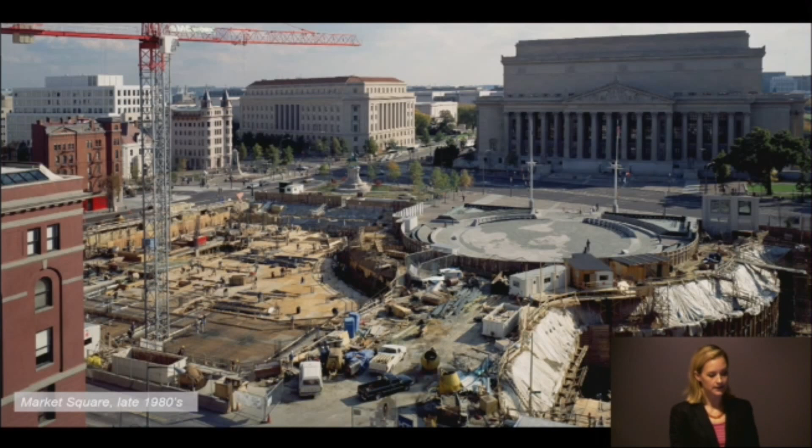Over 40 years ago, in 1972, Congress established the Pennsylvania Avenue Development Corporation, PADC, to direct millions of dollars in public and private reinvestment into the street after it had fallen into disrepair. The PADC developed the 1974 Pennsylvania Avenue Plan and square guidelines to carefully restructure the avenue into a place that would balance the needs of the nation and the city.

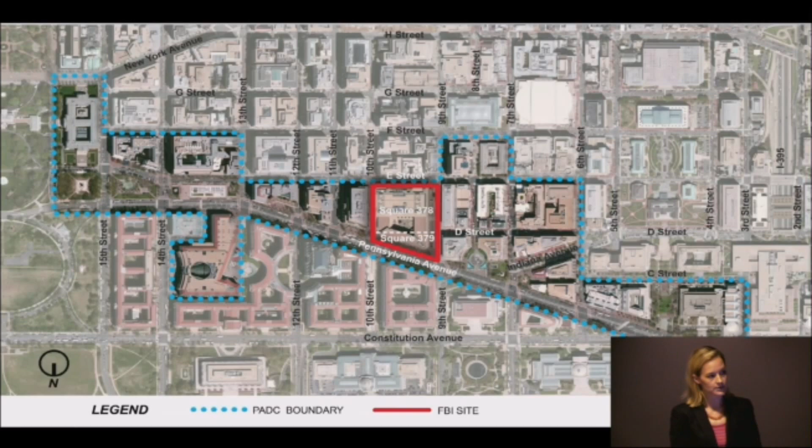And during this time, at the center of it all, the J. Edgar Hoover building was constructed to house the FBI headquarters. The Hoover building and the site fall squarely in the center of the PADC boundary and the avenue itself. You can see square 378 to the north, and then square 379 directly on Pennsylvania Avenue.

While PADC was dissolved in 1996, the plan and related documents are still in effect today and will guide redevelopment of this site. The 1974 plan is the foundational document that includes the goals, objectives, and the development framework for the area. PADC also developed general guidelines which provide uniform standards for development, such as high architectural quality, for example.

And finally, PADC developed square guidelines for each square in the PADC boundary. These provide the most guidance for development and are similar to zoning. Interestingly, square guidelines were not developed for squares with federal facilities, so squares 378 and 379 with the Hoover building don't have any.

When the plan and square guidelines were created, it was not anticipated that this site would become private in the future. The plan itself simply describes the Hoover building, which was under construction when the plan was created, and envisions the site for federal office use.

So in anticipation of the site transitioning to a private use, GSA and NCPC worked with stakeholders this past winter to amend the plan. It now envisions the site as a high-density, mixed-use development, which I'll talk more about as we dive into the topics for square guidelines.

Okay, so now I want to talk a little bit about what square guidelines are in specificity and then also the process for developing them. So by definition, square guidelines are detailed urban planning and design requirements and recommendations which are applicable to each square, and basically they're there to help implement the Pennsylvania Avenue plan.

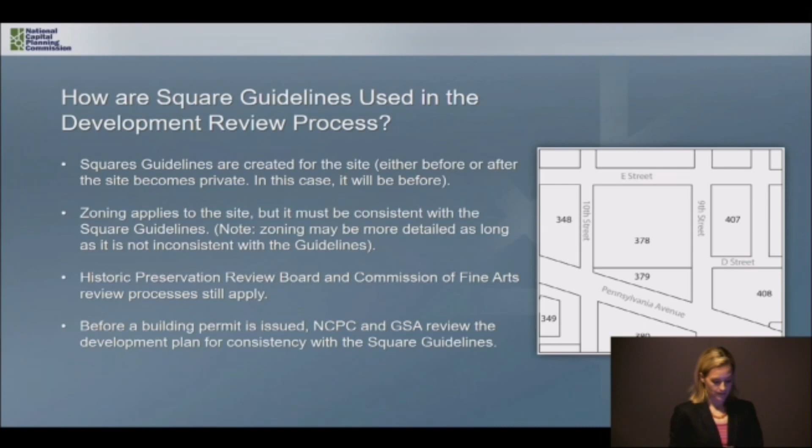So here we are this week, April 26th and 28th. As Elizabeth said, we're having the same meeting twice, just so that people can attend.

We'll be talking largely about topics in square guidelines today. What we would like to do is go to our commission this June with a very high-level proposal of the different topics we think we'll include in the square guidelines, and also a high-level concept for building massing. Then throughout the summer, we'll be working with stakeholders to develop a more complete draft of the square guidelines.

We'll do an information presentation for the Commission of Fine Arts. We'll hold another public meeting, and then we plan on coming back to our commission here later in the fall with that draft concept, and then we'll come back one more time, likely at the end of the year, with a final version. So there really are four more opportunities for public input on these guidelines.

In terms of the larger picture, there are other processes underway this year that are relevant to the development of square guidelines. Federal agencies and other stakeholders are working through the Section 106 process to ensure this project does not have an adverse effect on historic resources such as the Pennsylvania Avenue Historic District.

GSA will be issuing the final environmental impact statement later this fall. And lastly, NCPC is leading the Pennsylvania Avenue Initiative, which is an effort to update or prepare a new plan for the avenue.

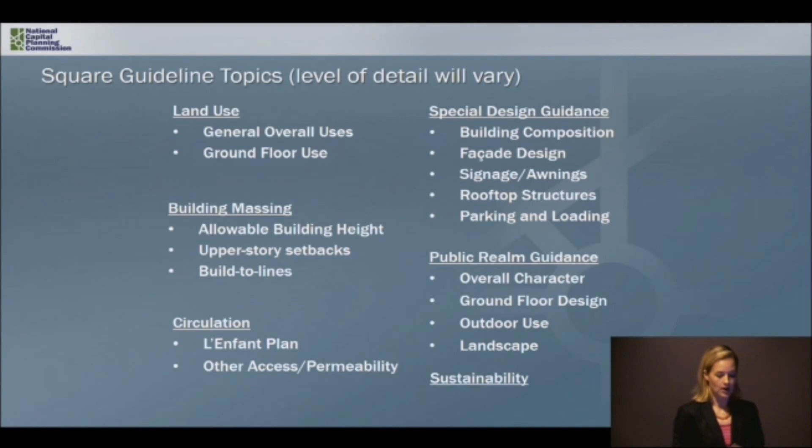And I'll walk through some of these now and talk a little bit about what the plan amendment said and opportunities to provide additional guidance.

So the first is land use, and actually the plan amendment addresses land use in a decent amount of detail. It calls for accommodating high-density development with a mix of uses such as commercial, residential, and cultural uses. It calls for that new development to complement and enhance all of the surrounding downtown blocks, and that ground floor uses are designed on Pennsylvania Avenue to accommodate and encourage everyday activities, commerce, and public uses. So we have an opportunity in the guidelines to provide more direction if we think it's necessary.

While a specific land use mix for the site will be difficult to determine at this time, as I mentioned before, the guidelines could emphasize desired land uses or ground floor uses on Pennsylvania Avenue, for example.

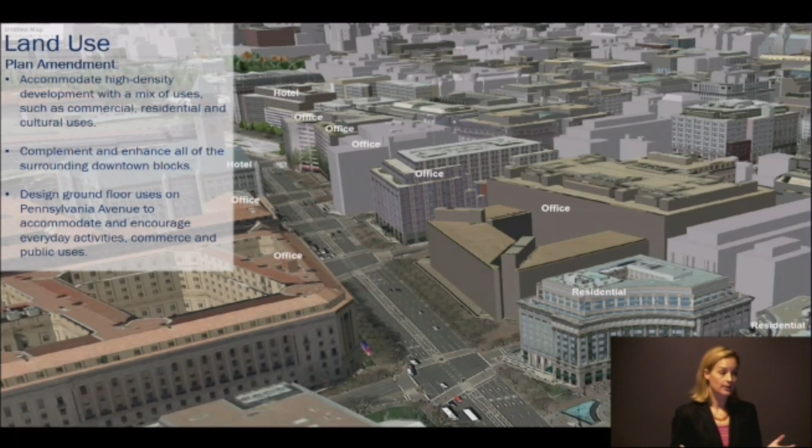Okay, so the next topic area is building massing. This means the overall shape of the building, or of the development, in terms of volume. The plan amendment has a clear vision for high-density development and states that building massing and articulation should befit its location, meaning new development should look to its surroundings.

Two components of building massing are height and upper story setbacks. These contribute to protecting view sheds, creating a consistent building wall along a street, and establishing a scale that is comfortable for a pedestrian. Interestingly, the Hoover building sits at a transition point for the avenue.

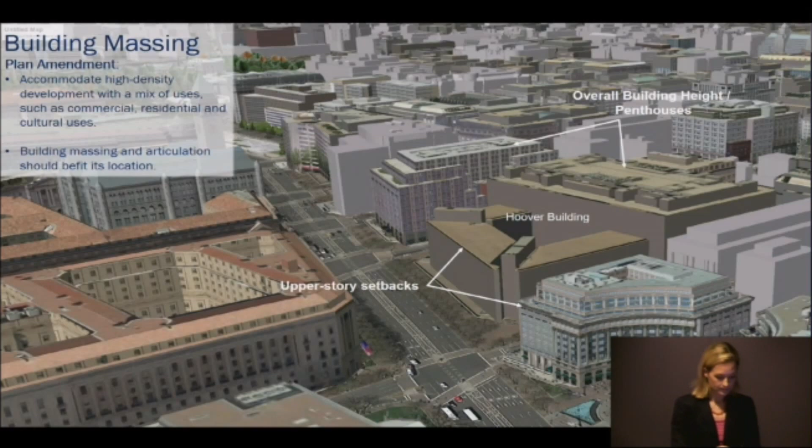Build-to lines, sometimes referred to as setbacks, indicate the line at which construction of the building facade can occur on a lot. For example, the current build-to line for the Hoover building is 75 feet from the curb of Pennsylvania Avenue. Build-to lines are important because they can have an impact on view sheds, the building wall along a street, and the character of the space in front of the building, in addition to the overall developable area of the site.

The plan amendment calls for redevelopment to respect the principles of the L'Enfant Plan by restoring views, and new development should provide and contribute to the avenue's distinguished character, and strengthen the vista of the U.S. Capitol.

Given the broad guidance in the plan amendment, there is an opportunity to look at the site's build-to lines and the square guidelines in more detail, and we'll actually look a little bit at that in the next section of the presentation.

Circulation is an important concept for a site this large. You'll notice that a single FBI building is comparable to the three buildings to the east. The plan amendment calls for redevelopment to respect the principles of the L'Enfant Plan by restoring circulation patterns.

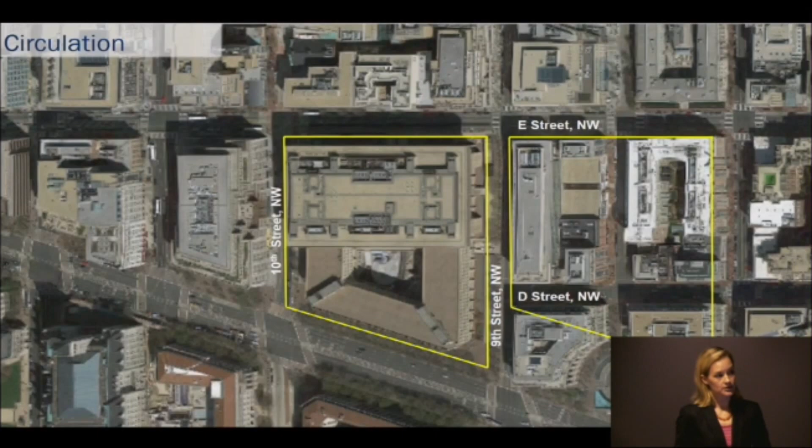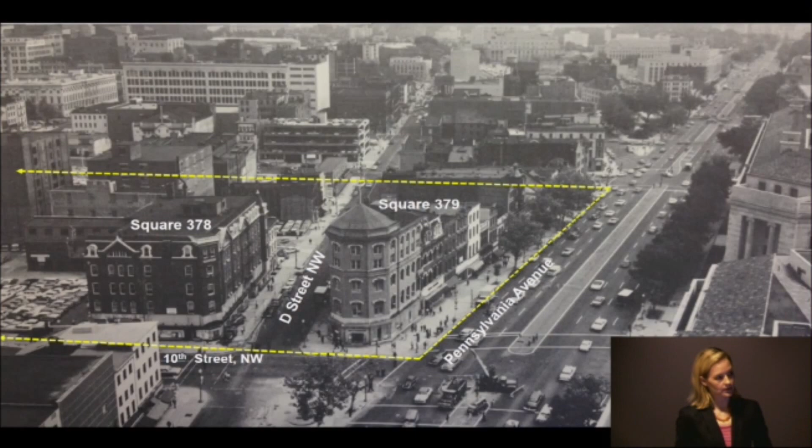And this is where D Street ends today. There's an opportunity in the square guidelines to acknowledge whether the spatial configuration of D Street, whether it's a dedicated right-of-way or not, is desirable and appropriate to reintroduce into the site. And there's also the opportunity to discuss additional circulation throughout the site.

And then with regard to special design guidelines, the plan amendment does not go into any specific level of detail, but we could, if desired through the square guidelines, address things like facade design, building composition, appropriate signage and awnings, location of rooftop structures, and parking and loading for the site.

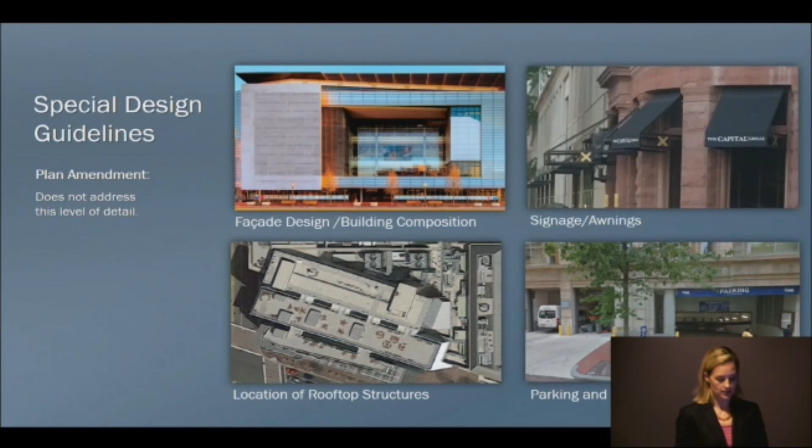Although I will say, especially with parking and loading, some of that will not be addressed in a very specific level of detail just because we will not have a parcelization plan. But there are general guidelines that we could move forward.

And then with regard to public realm, there are guidelines that we could present related to ground floor design, landscape, outdoor uses, and character, all of which again influence the character and quality of the streets surrounding the site.

So with that brief overview, I'd like to stop and take a moment to see if there's any questions about the topics we're considering for the square guidelines. These are, again, fairly typical of what comprise most of the guidelines for the squares within the PADC boundary.

There have been a few cases where much more specific guidelines have been developed, but I think in this case, given the timing of which we're developing these square guidelines, that this is probably close to an appropriate number of topic areas for us to address.

And I think one of the questions that we have for folks is, are there other things that we're missing here? We will have a lot of opportunity in the future to talk about level of detail, but right now we're just trying to hone in on the actual topics themselves.

So as you're sitting here in the darkness, I will ask you all very uncomfortably if anyone has any comments on topic areas. If I turn the lights on, would you be more willing to speak? No. Okay, well then I'm going to keep moving forward. Or no? Okay. So then, now actually we can probably just wait and go through the whole presentation and maybe have comments then.

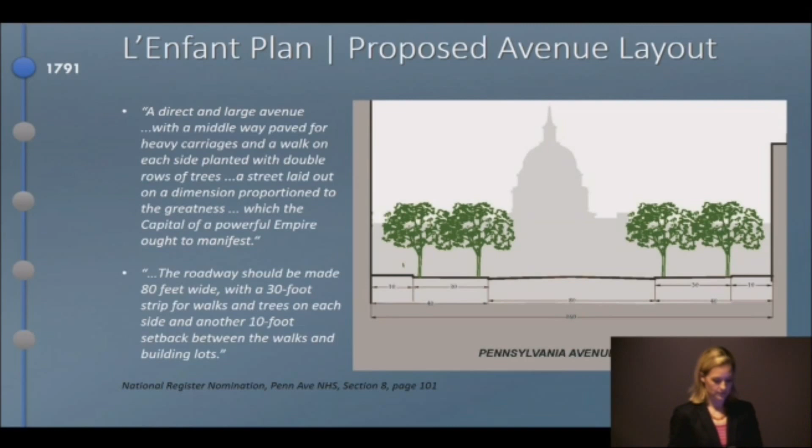Let's take a quick look at how the avenue has changed over time. This is actually really quite interesting. In 1791, L'Enfant designed the avenue as a direct and large avenue with a walk on each side planted with double rows of trees. He put 80 feet in the middle for carriages and then 40 feet on each side with double rows of trees. This, however, was never implemented.

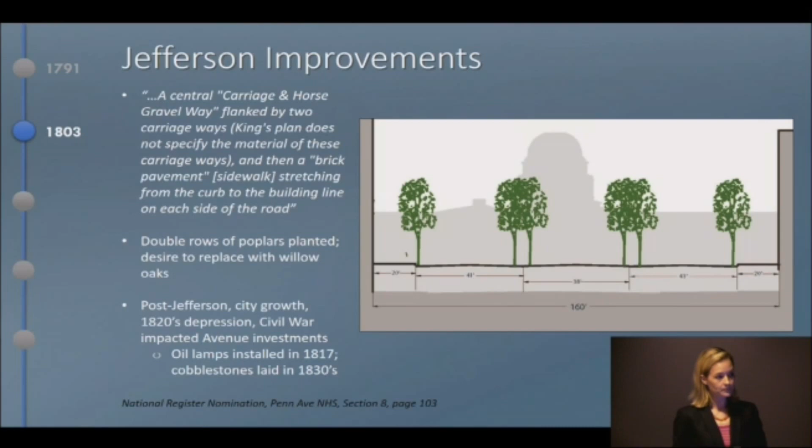Instead, Jefferson spent a quarter of the city's improvement budget in 1803 to plant four rows of fast-growing poplars the full distance of Pennsylvania Avenue. Still 160 feet wide, just like all of our great avenues, but this was what the section of the street looked like, and it had multiple carriageways.

Then by 1901, the McMillan Plan proposed the Federal Triangle, and Pennsylvania Avenue had changed once again. This time the cartway was widened to about 107 feet, and the sidewalks were reduced, accommodating now just a single row of trees.

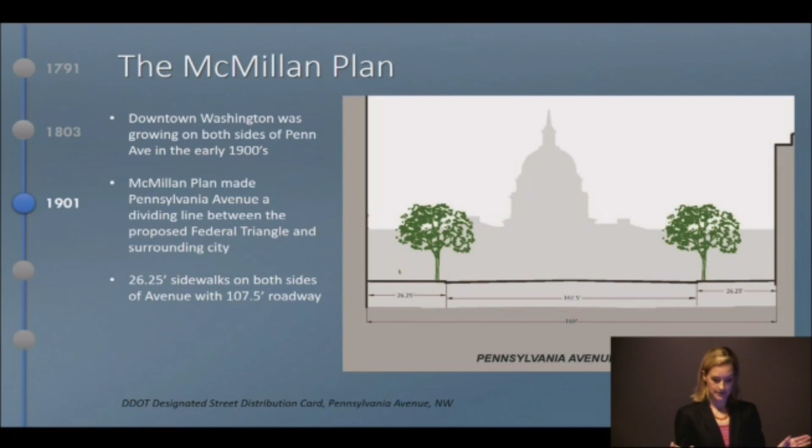Fast forward to 1974, the Pennsylvania Avenue Development Corporation altered the street one more time. It was determined that the larger cartway needed to remain because at this time there was a lot of traffic using the site, so they decided to keep the larger cartway.

And it was decided that the sidewalk areas were too small, so PADC, under the PADC plan, went in and widened the avenue on the north side, adding an additional 50 feet to the already 25 feet for sites that were going to redevelop. So you have a 75-foot build-to line and proposed three rows of trees.

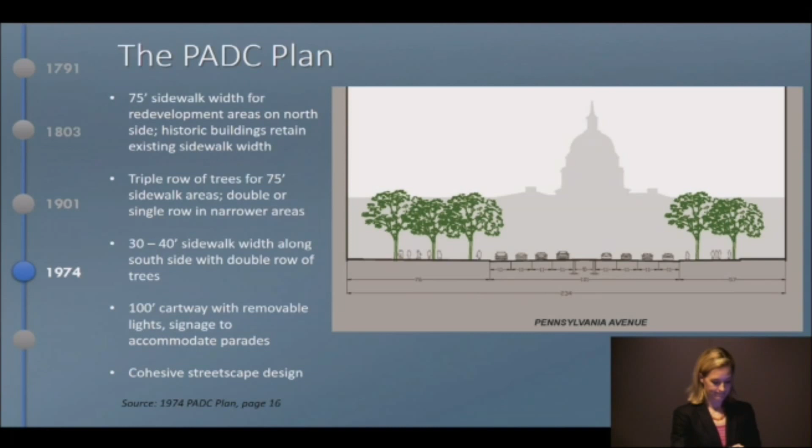And then they also widened the avenue on the south side, but only by a couple of feet, and you now have two rows of trees on the south side. And that's pretty much what remains today.

So you can look at the conditions here. We've simplified it a bit, but the area in dark green represents where the build-to line is 75 feet from the curb, largely on the north side of the street. The light green is around 45 to 50, and the red shows largely where the historic buildings are, around 25 to 30 feet or less. Now, while it varies, a significant portion of the build-to lines on the avenue are at least 45 feet from the curb.

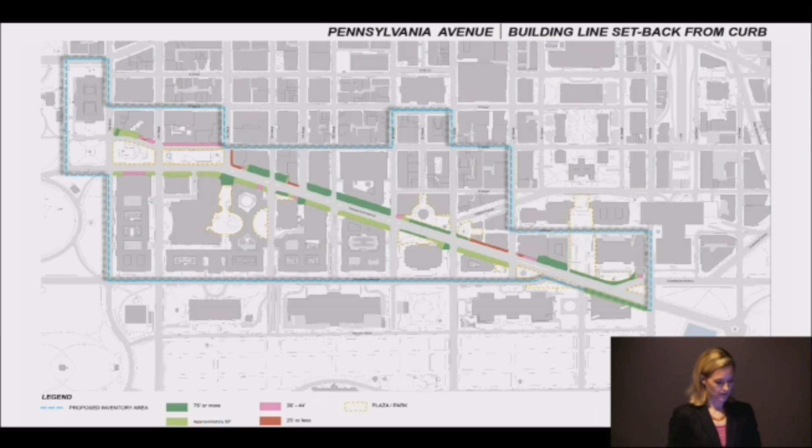And of course, the rows of trees increases with the larger build-to line.

Okay, so first, let's look at what it would mean to reestablish the L'Enfant plan on the Hoover site, which is a very important policy for both NCPC and the district to reestablish the L'Enfant plan.

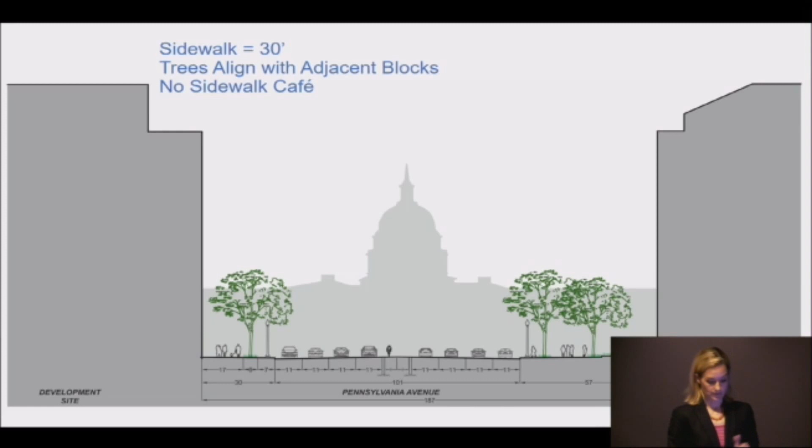Under the changed conditions of Pennsylvania Avenue, this would mean that development on the Hoover site would move forward to 30 feet from the curb. This presents some benefits and some drawbacks. This is an area of the avenue where the build-to line is around 30 feet.

The benefit is that it allows for more development, and I think most people would argue that density on the north side of the street is definitely needed to better activate the street. Moving the build-to line forward also makes the building wall a more prominent element of the street, and some would argue that's a positive thing as well.

Here's another example. In some ways, it's a very urban and intimate experience. The drawback, however, is that only a single row of trees can be planted, and there isn't much space for outdoor activity, and sometimes it can even be a little crowded depending on how many people are out and about.

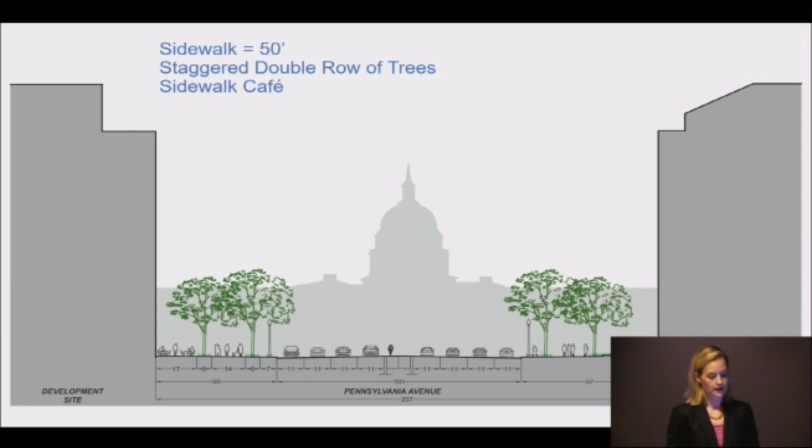Now, a more typical condition, especially on the south side of Pennsylvania Avenue, is the build-to line around 45 to 50 feet. This accommodates the double row of trees that L'Enfant envisioned and space for outdoor activity if desired. Here's an example of what that looks like, from the building face to the curb—about 50 feet.

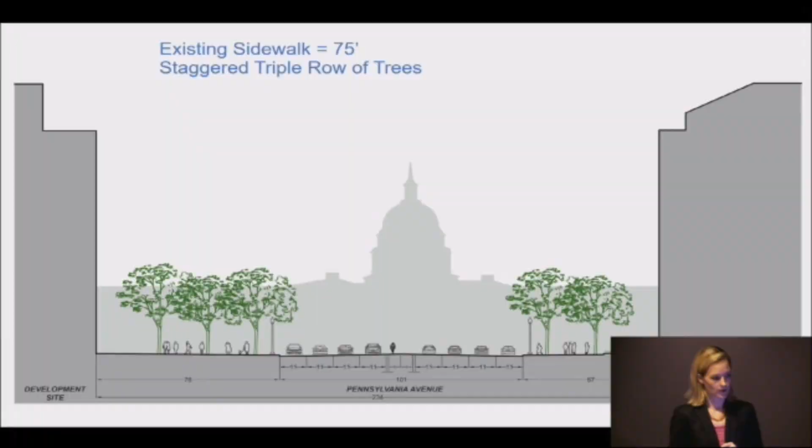And then there's the current condition in front of the Hoover building, where the build-to line is 75 feet. This is the same as the block to the west of the Hoover building.

Now, most would argue that this space doesn't work at all. Is it because there are no ground floor uses, no street furnishings, or is it simply too much space to ever be successful? This image is also a good example of how the build-to lines on the avenue don't align.

You can see Market Square actually extending forward pretty close to the curb. It comes out to about 35 feet from the curb. I think that's really interesting.

So let's look now at how moving the build-to line changes the wall of buildings along the avenue and how it changes the pedestrian experience. We'll talk about how the build-to line and height can change views of the Capitol in the next section.

So here we are standing in the center of Pennsylvania Avenue looking towards the Capitol. You can see the FBI building right there. And now we're just going to turn this into a modeling image. Same thing.

Looking towards the Capitol, here you have the historic Evening Star building, which comes up pretty close—about 25 to 30 feet from the curb. Then it widens again at 1001 Pennsylvania. This is where you have the three rows of trees, 75 feet from the curb.

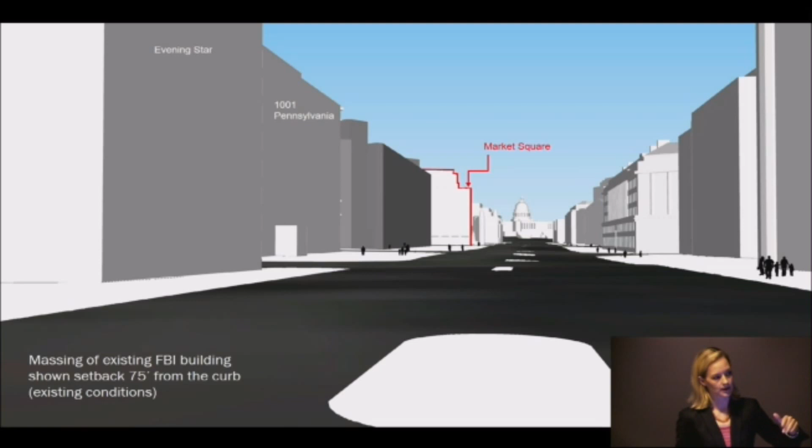All right, so what we're going to do now, looking at the building wall changing and moving forward, is fast forward here and move the FBI building. We're using the massing of the FBI building as an example. It's 108 feet tall at its initial height. We're going to move it forward to 50 feet.

Not that noticeably different. You can still see Market Square. It sort of sits in between Market Square and 1001 Pennsylvania Avenue now. This 50-foot build-to line is now in line with the Department of Justice across the street, also with a 50-foot build-to line.

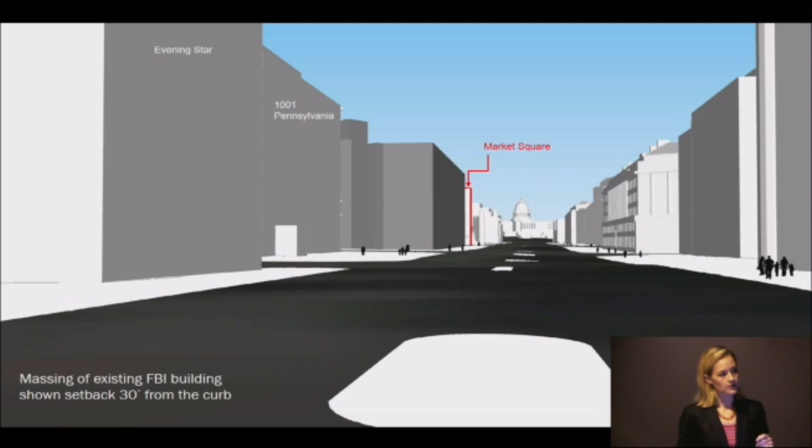Now let's move it forward to 30 feet from the curb, which would be the dimensions of the L'Enfant plan. You really can't see much of Market Square anymore. There are some benefits and drawbacks here—it actually starts to enclose the space in front of 1001 Pennsylvania Avenue in some ways, but it also definitely appears to be sticking out a little bit more.

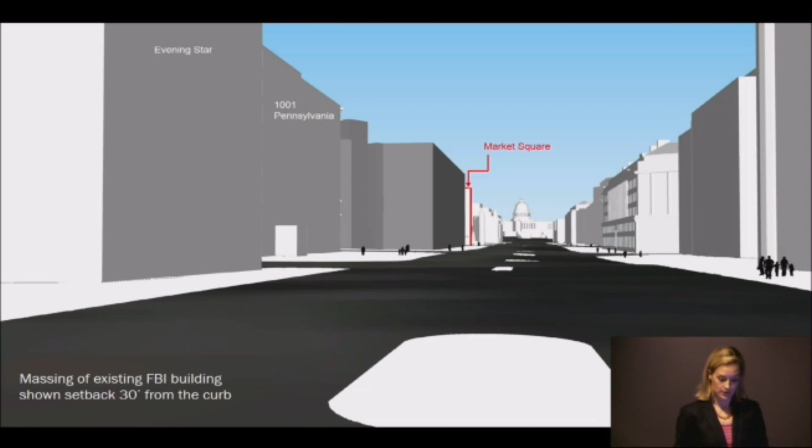You could no longer accommodate a double or triple row of trees at this build-to line. It would have to be a single row of trees and look more like the condition in front of Evening Star. Now we'll do this looking from the other direction, and I can probably go through these a little bit faster. So you see the FBI building.

And now Market Square is in the foreground and 1001 in the background. This is still the existing condition, 75 feet from the curb.

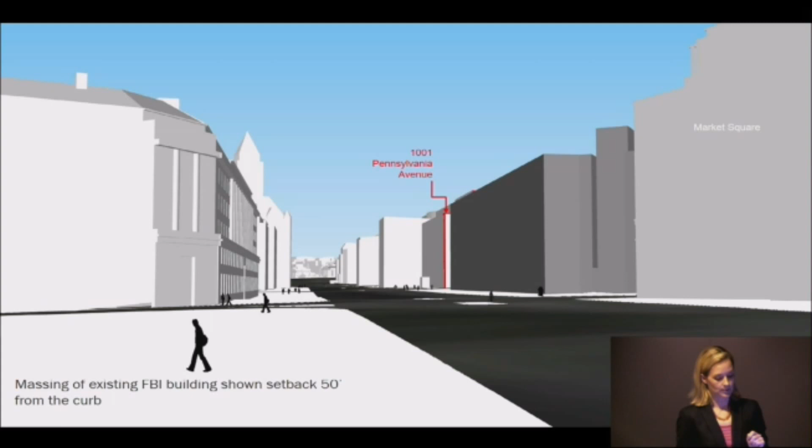And if we move it forward, moving the build-to line to 50 feet places the building in between that of 1001 and Market Square.

And then when you move it forward again, you can no longer see 1001 Pennsylvania. From this perspective, it appears that Market Square and FBI are sort of in line with one another. But actually, the FBI building would be coming out an additional 5 feet from where Market Square is.

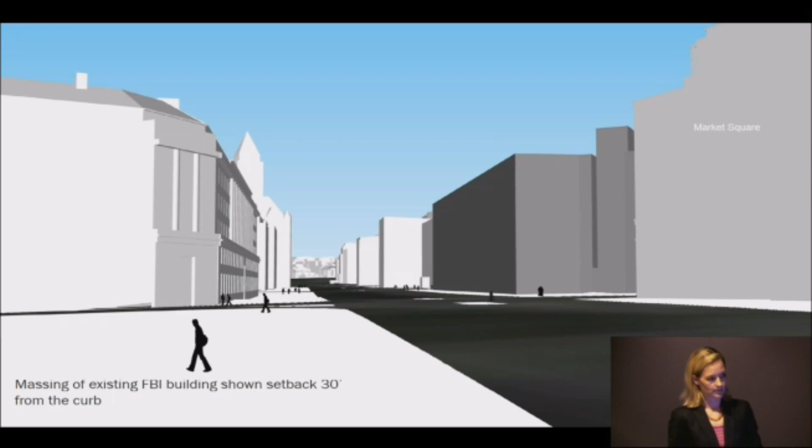So the last thing I wanted to convey about the build-to line is the development plan for the site itself. This is also really important. We've just looked at impacts to the avenue, but I think we also have to look at what it means for the site.

Now let's assume the spatial configuration of D Street is required. There are many different ways in which squares 378 and 379 can be designed. The development project could focus activity and public space in the interior of the site, similar to what City Center does. Or it could focus that activity on the exterior, such as on Pennsylvania Avenue and E Street.

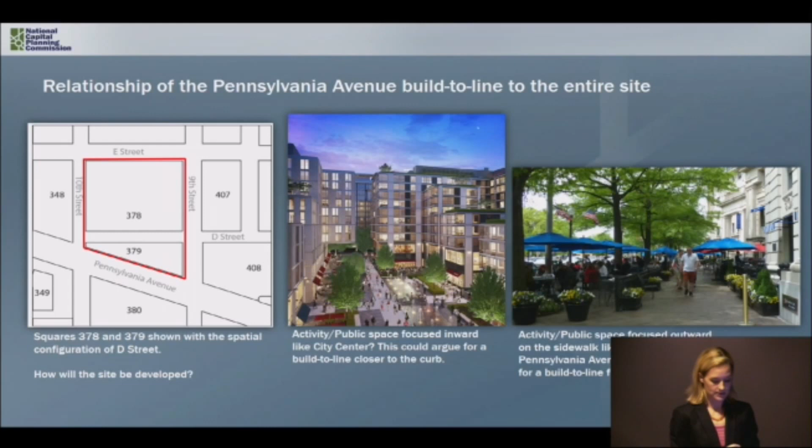If you focused it on the interior, that might argue for a smaller build-to line on Pennsylvania Avenue. But if you focused it on the exterior, then you might argue for a little more space along the avenue itself. These are the types of questions we're considering as we develop guidelines for the site.

So I've presented several considerations here, and some of the questions we have and would really like to hear from you, either here tonight or over the next couple of weeks, in terms of the pedestrian experience on Pennsylvania Avenue: What elements are important? Should these elements be consistent along the avenue, or is it okay for variation? For example, retail, restaurants, trees, that sort of thing.

What do you see as the benefit and drawbacks to the different build-to lines for the Hoover site? And third, is there any additional analysis or other information that you think would be beneficial to determining the Pennsylvania Avenue build-to line for this site?

So unless there's any burning questions, are there any comments? I would love—yes, I have a couple of comments. Okay, just so people know, I used to work at Pennsylvania Avenue Development Corporation, so I'm supposed to turn this on. Sorry. Stay red. There we go.

Hi, my name is Joanne Newhouse. I used to work at the Pennsylvania Avenue Development Corporation, so I'm sure they knew I would speak. I just want to go over a couple of things. First of all, the urban design of the avenue is very critical and was critical to its creation.

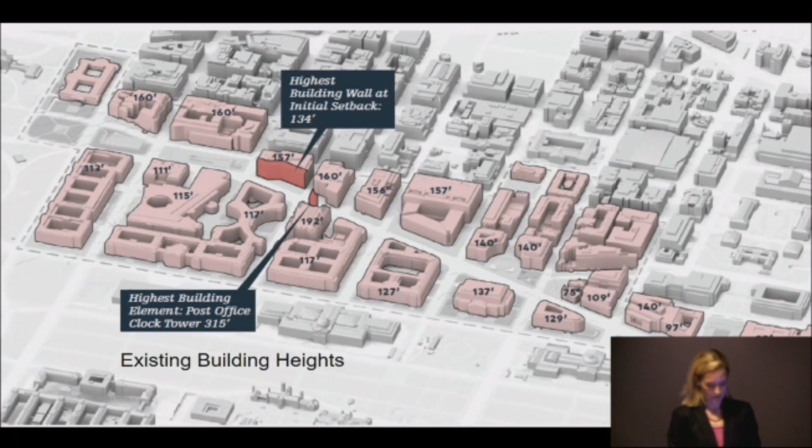The Pennsylvania Avenue plan is very clear about these initial building heights on Pennsylvania Avenue being compatible with their surroundings and setting back to 160 feet to protect views of the Capitol.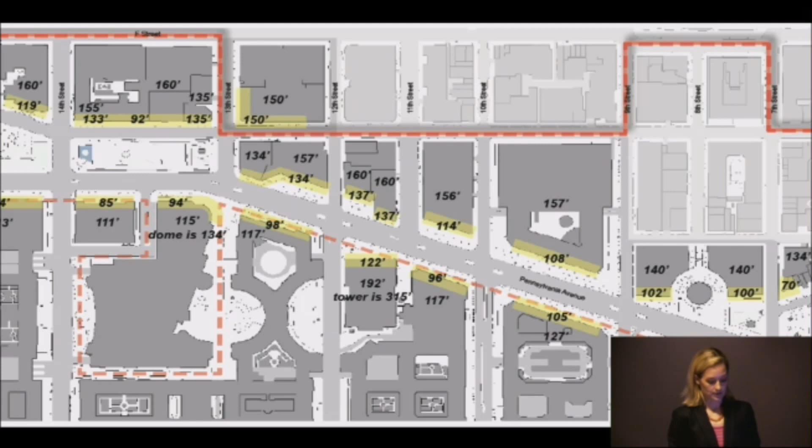So here you can see the Department of Justice initially rises to 105 and then sets back to 127. From this perspective, you get a good view of Market Square, which rises to about 102 and steps back to, Joanne, I think we have 140, but that could be the top of the penthouse. I'd have to zoom in to see.

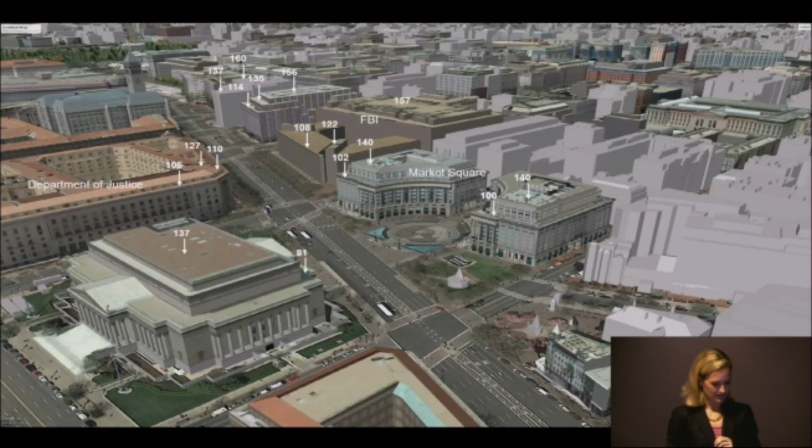So now let's look at the same set of images again, but this time looking at how shifting the build-to line changes the impact of the initial building height. As we're doing this, consider whether moving the build-to line forward changes the view of the Capitol or the symmetry of the buildings. This gets a little more technical.

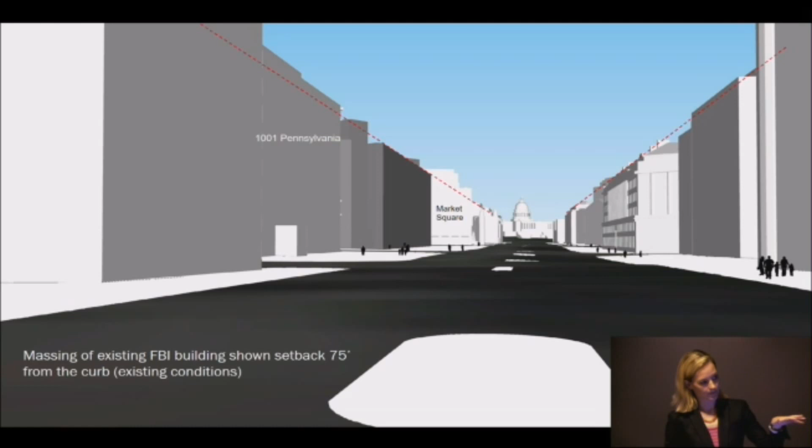Okay, so here we are again. This is the same set of images. This time we're looking at the Capitol, and FBI sits in between 1001 Pennsylvania and Market Square. This is the existing setback of the FBI building at 75 feet, and it goes to 108 feet for its initial building height. So now I'm going to move it forward and watch the red.

So those two red lines denoting the view from the Capitol are fairly symmetrical. And when you move the building forward, the red line changes, and I left the initial line in there just so you could see how much it changed. It's very faint.

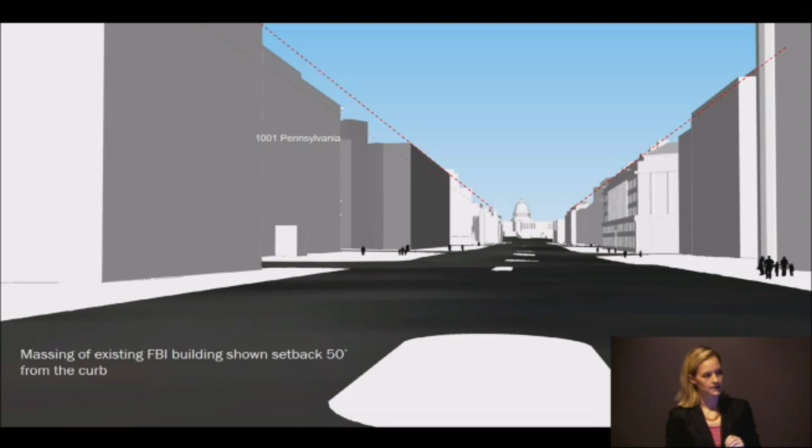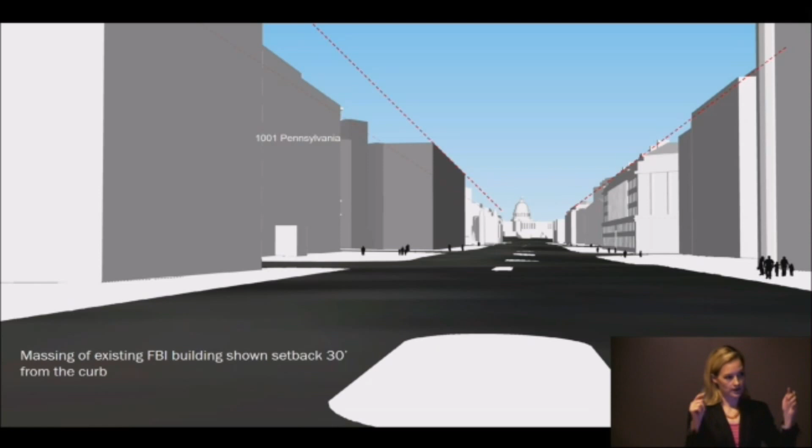It's a little less symmetrical, but it's nuanced. It's not that big of a change. But then if you keep the same building height and then move it forward to 30 feet from the curb, that one red line on the left side of the slide starts to create a situation where the two lines are no longer symmetrical, meaning that the initial heights of the buildings along the avenue are not creating a symmetrical view.

So that was a very quick overview of height, and we're just starting to grapple with some of these issues in terms of the relationship of the build-to line and the initial height on Pennsylvania Avenue. But I think some of the broader questions with regard to tackling that is, given the plan amendment, that the plan amendment envisions the site as a high-density mixed-use development, and that the 1910 Height Act allows a height of up to 160 feet, what should we consider when developing guidelines related to height?

How important is symmetry along the avenue? Should this be achieved through the building wall, the tree canopy, both, or none at all? And is there additional analysis or other information with regard to height that you think would be helpful in determining the design guidelines for this site? So I think I'm going to turn the lights on now.

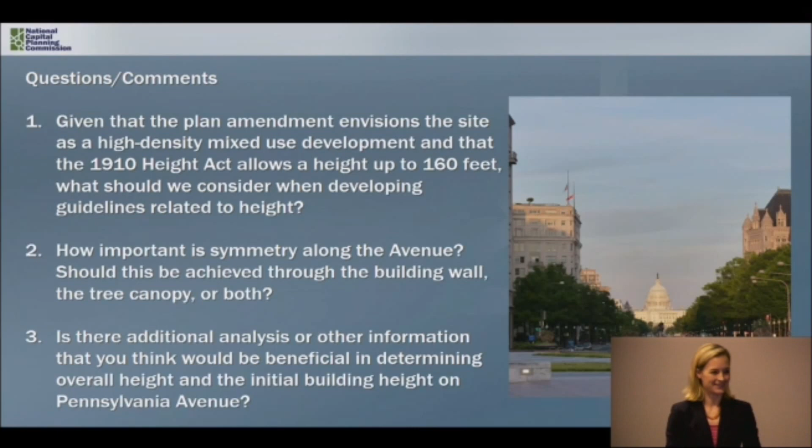My comment is, if, and I'm assuming most people here are concerned about the Capitol Vista, if we're so concerned about the Capitol Vista, we should probably tear down all the stoplights and get rid of car traffic on Pennsylvania Avenue, because in my opinion, that's the ugliest thing about Pennsylvania Avenue.